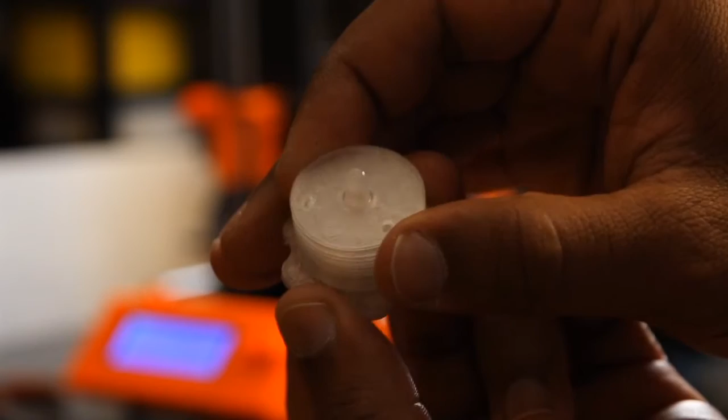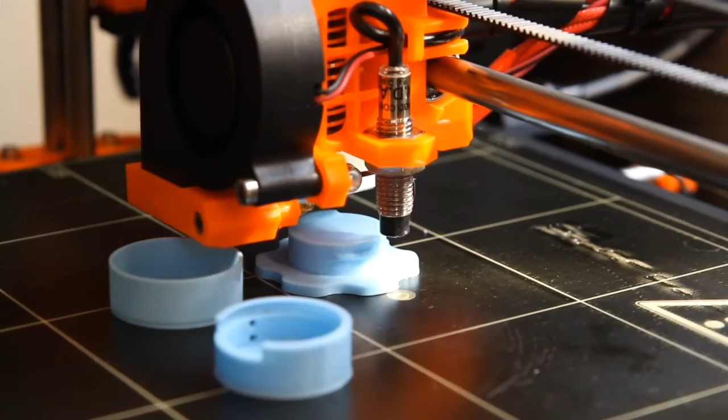So I went about designing these little LED tea lights that basically just turn on and off just by rotating the bottom. All you need for this assembly is an LED, a 3-volt coin cell battery, and your 3D printed parts. After printing and assembling a bunch of these, I inserted them into some of my previous 3D prints.

Check out these lit up prints of my hanging lamp, my giant crystal, my pumpkin, Nefertiti, and even some kryptonite.

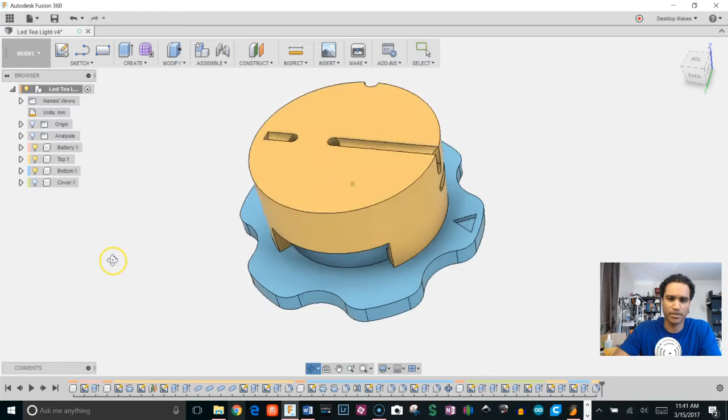So here's the finished model, and as you can see I have these organized into components. As I start untoggling these, you can see the parts below. I'm going to remove the cover, and if I remove that bottom piece, we're left with the battery and the top. I don't need to see the battery right now, so I'll remove that, which leaves us with this top part, which is going to be the focus of what I'm going to show. So I'm just going to show how I created this shape along with these channels and these holes here.

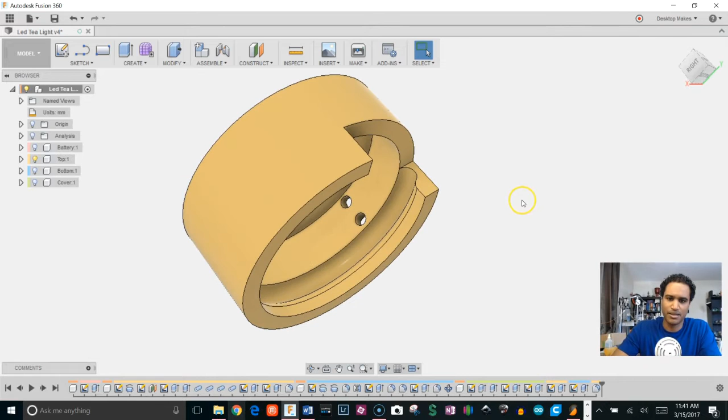I want to mention that when I first started designing, the way I would have approached this would have been to probably create a circle, extrude that down, create an offset circle, and extrude it in to get this cut, and then would have probably gone ahead and created another circle in the middle here to get this groove in the middle. So you're talking 3 steps there.

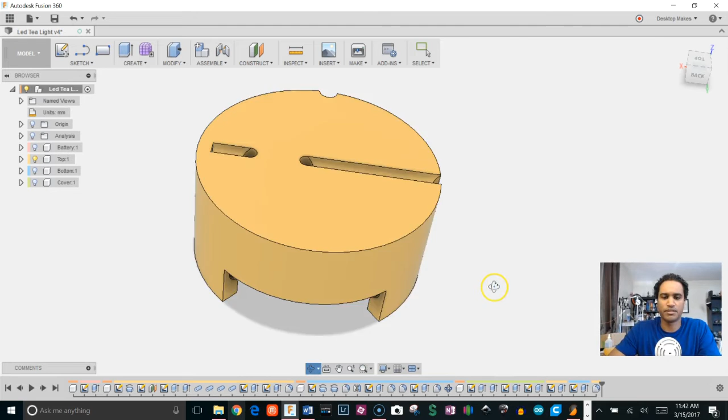The more experience you begin to have, the more ways you start looking into more efficient ways of drawing and modeling. So right now I can tell you the best way really to approach this is just to create a sketch and revolve it. So let's go ahead and do that.

I'm going to go ahead and go to New Design, and the first thing I'll do is keep in line with the sort of design structure I use here, which is I'm going to create a component. Now I'm just going to create this part, but I want to show you guys how I went about creating components. I'm just going to right click over here on the top of my browser where your name, once you saved your file, would be located. So you right click, click new component, and then I'm just going to click on this to give it a name. I'm just going to call it top.

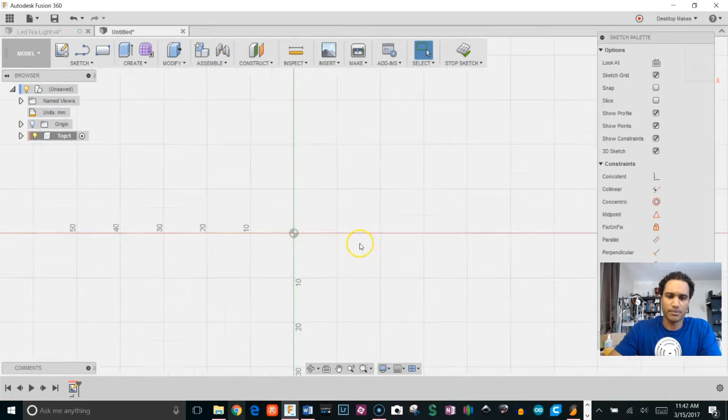Okay, so now I'm ready to begin creating a sketch. I'm going to go to create sketch and choose that ZX plane here. And I'm going to zoom in. I have these grids set to 10 millimeters apart, so I'm going to zoom in to about 1 grid size.

Okay, now I'm going to move fairly quick through this. If you actually want to follow along, check out the design course that I'm going to leave the link below, because I go a lot slower with that and explain and describe each step that I take. But I really want to try to keep this to just a few minutes. So let's go ahead and begin.

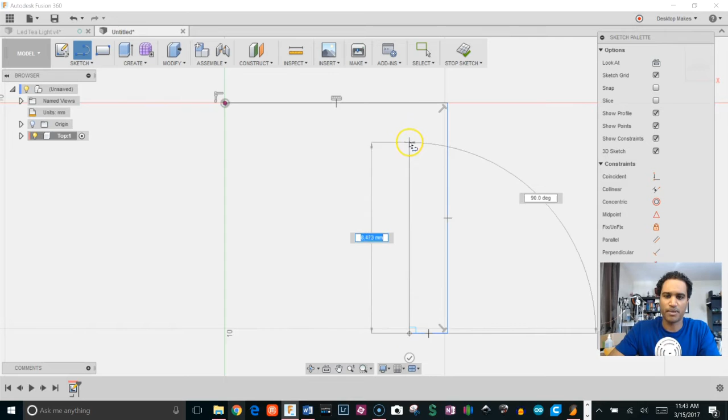I'm going to click the L tool for a line, and I'm going to start with just going ahead and drawing a basic shape of what I want my profile to be, not worrying so much about dimensions. I mean, I'm going to get them close to what I want them to be, but not worrying about getting them spot on. So you see I have a mixture of black and blue lines. Black lines are fully constrained. Blue lines can be moved around.

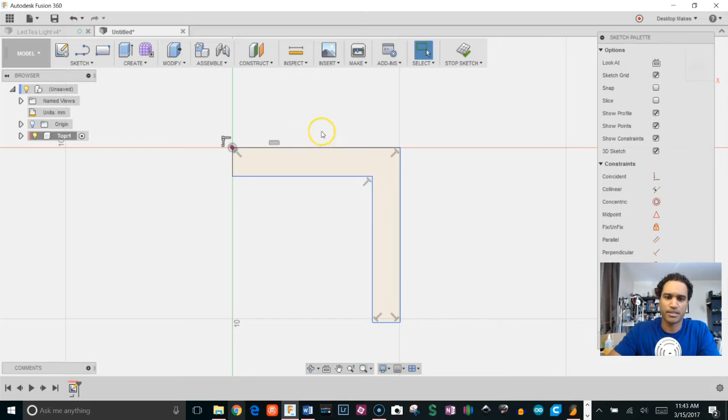So I'm going to hit D for dimension, and start with this line up top here. I want this to be 13 millimeters, I want this side to be 12, the bottom here to be 2, and I'm going to make this side here also 2. Now everything is fully constrained.

To go about and also get this channel in the middle here, I'm going to do that by drawing a circle. Right now I'm just going to put it into space, and I'm going to make it 2.5 millimeters and set that a distance of 3.5 millimeters from this bottom edge. I want this to be on this line, so I'm going to hit the coincident constraint, click on the circle, click on this, click on the circle, click on this line, and there we go.

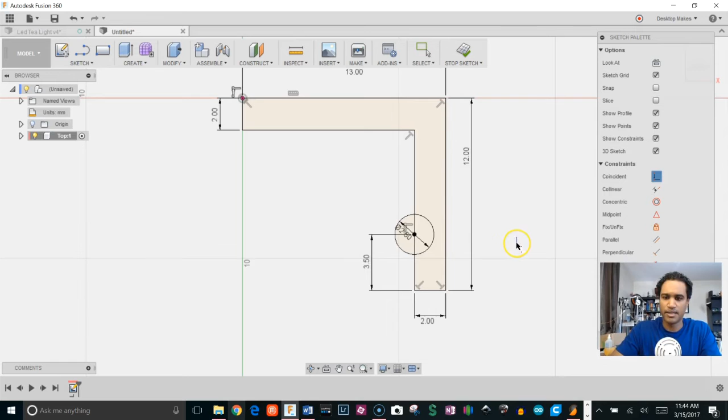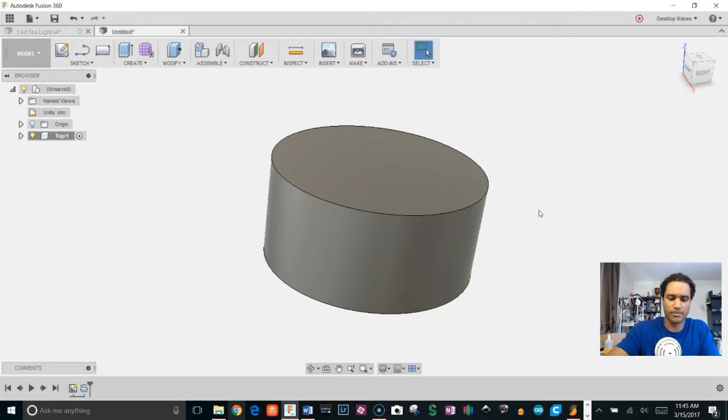So now I have everything I need to create my revolve. I'm going to click on Stop Sketch, and let's go ahead and go to Create Revolve. Click on this, choose Axis, and I'll click on that blue axis there, and that's going to give me a revolve with that channel right in the middle there. So that's my shape. The reason it has this color is because I had Shift N toggled on. If you click on just keyboard Shift N, it'll automatically assign a different color to your different components, just a nice way to kind of keep them organized or visually organized. So you can toggle that on or off if you want.

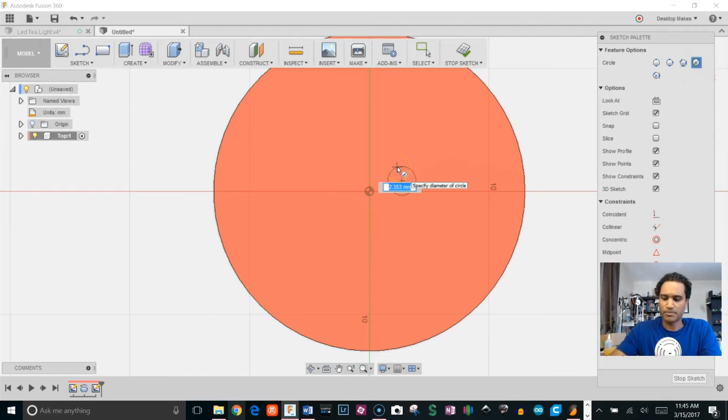Next we're going to go ahead and make the sketches that we need for this top and side profile. So I'm going to create a sketch on this top surface. I'm going to start with a circle, make that 1.5 millimeters, and let's go ahead and constrain that. I'm going to put a horizontal constraint between that and that origin there, and then give it a dimension of 1.5 millimeters.

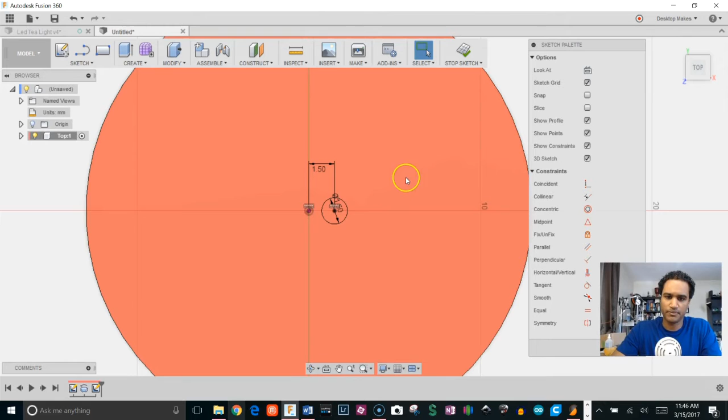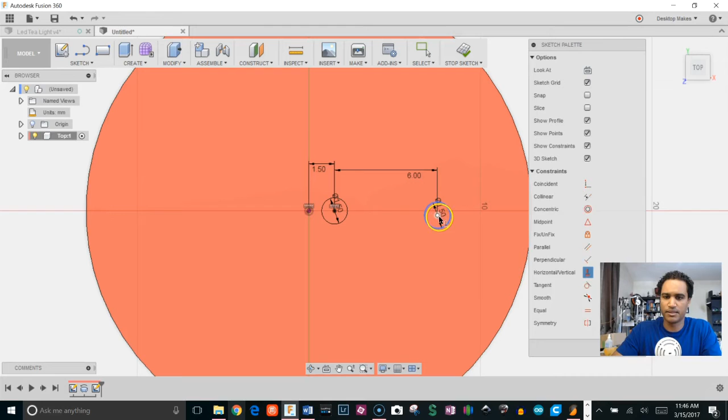Now I can create a second circle by drawing another one, but I can also just choose this, hit Control C and Control V. I'm in my dimension tool, so I have to first get out of that, so I'll hit Escape. Let's try that again. Select the circle, hit Control C, Control V, Command if you're on a Mac, and I'm going to move that over, click OK. D for dimension, this circle to be 6 millimeters from that circle. Notice it's still blue, so I can still move it around, and I have to now go ahead and constrain it horizontally to this origin. Now it's fully constrained, locked in place.

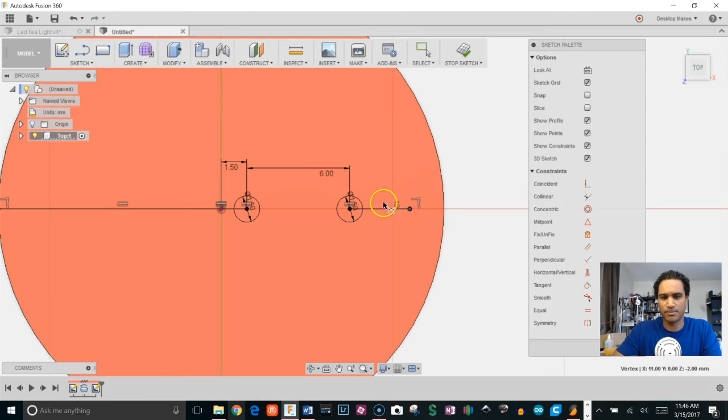Next I'm going to grab the L tool for a line, choose this circle, and go ahead and choose the edge, that perimeter, and let's make that line horizontal. So I'll grab the horizontal constraint, and I'm going to do the same thing with this line. I'm going to give this a dimension of 4 millimeters.

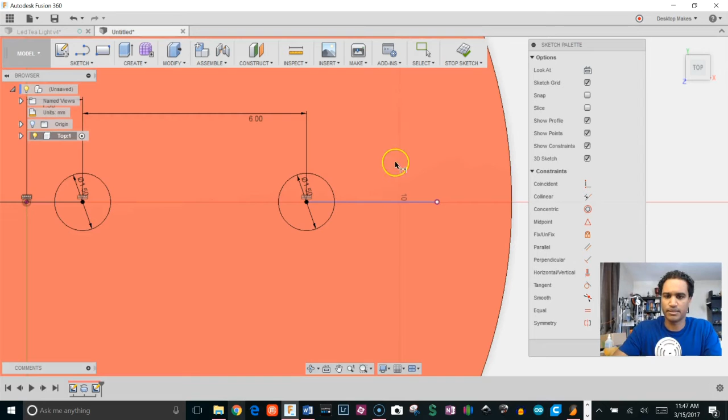Alright, it's telling me I'm over constraining. That's because somehow I accidentally entered a dimension. Let's try that again. Oh, here's also, you see how that constraint, sometimes you have to be careful when you draw things. You can accidentally set constraints that you don't want. So this is a coincident constraint. I don't want that, so I'm going to delete it. Now I can go ahead and dimension this, and it should let me do it.

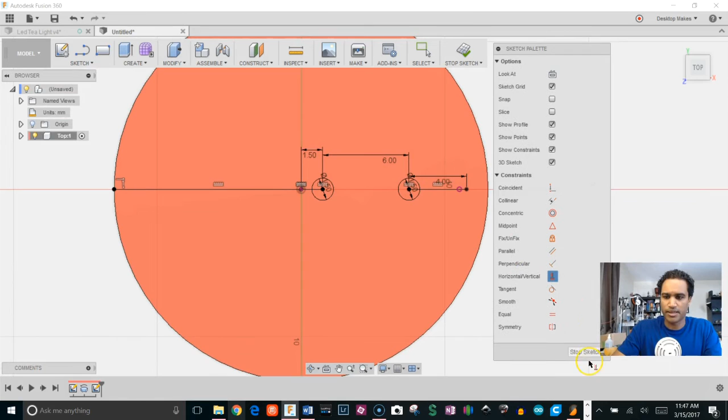4 millimeters. And that line is still blue, so it means that it's not fully constrained, which means I can move it, and I don't want it to move. So I'm going to grab my horizontal constraint, click on that line, and there we go. Okay, so let's go ahead and stop that sketch. That's everything we need. Everything is all black and fully constrained.

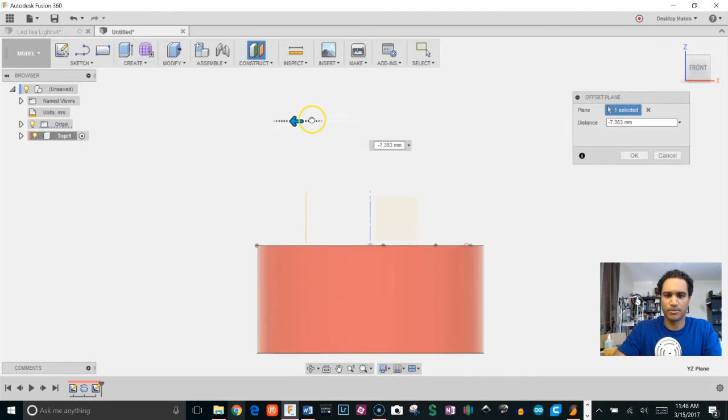Now I want to go ahead and draw the sketches to make this shape here. So let's go back, and to do that I'm going to create an offset plane. Click my origin on and select this YZ plane, and let's go ahead, we get this arrow so we can move it over left or right. Pay attention to the sign here: if I go right, it's a positive number, if I go left, it's negative. So I know that the radius when I first drew that profile was 13 millimeters, so I have to enter negative 13 millimeters if I want it on the other side.

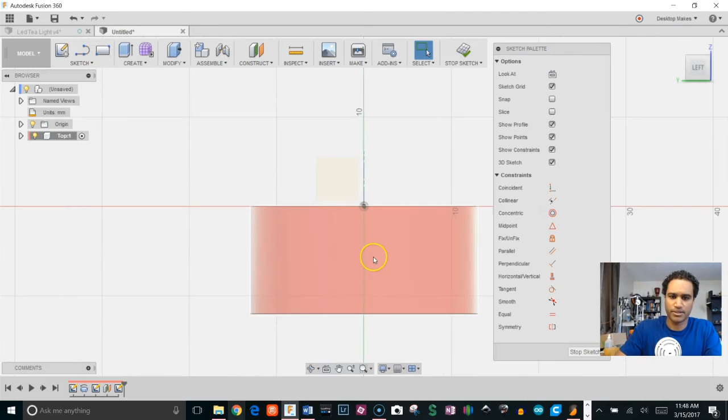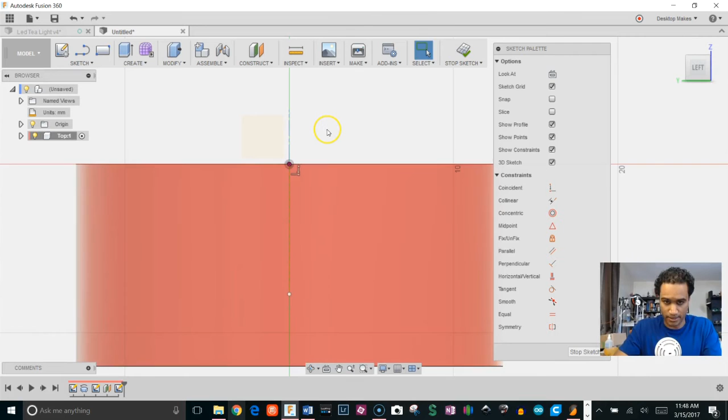I'm going to click OK, and then I'm going to click Create Sketch and sketch on that plane. So I'm going to start with the L tool for a line, just draw a line straight down, and I'm going to click X and make that a construction line. It brought in this projected line, and I don't need that, so I'm going to delete it, click on it and just hit delete. Now this I find a little bit annoying, how this highlights every time I hover over this shape.

So in order to avoid that, I'm just going to go ahead and expand my component here and uncheck bodies.

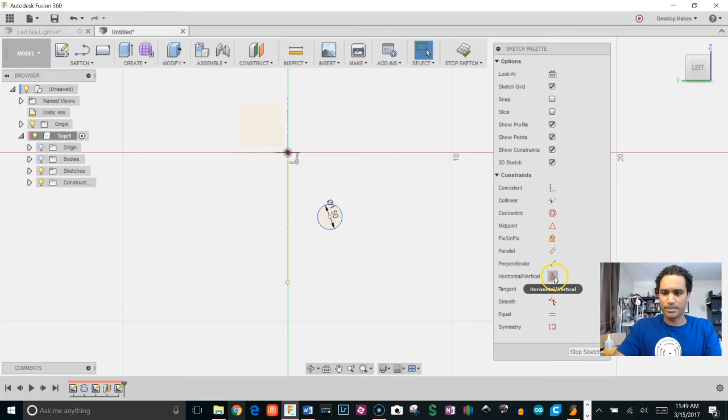Alright, so let's start with a circle. I'm going to draw a circle, give it a diameter of 1.5 millimeters. Let's go ahead and set that circle. Actually, let's do a dimension first.

We'll hit D for dimension, and we'll make this circle from this origin... let's do 3 millimeters. Actually, I want to point something out, so I'm going to hit Control Z real quick. Can't help myself. If I hit this and this, I get this dimension. That's a straight line dimension, and if I go more out, I get this vertical dimension. So you can choose which one you want.

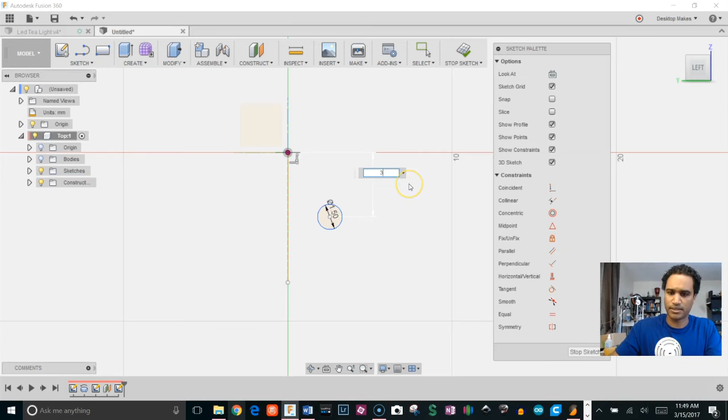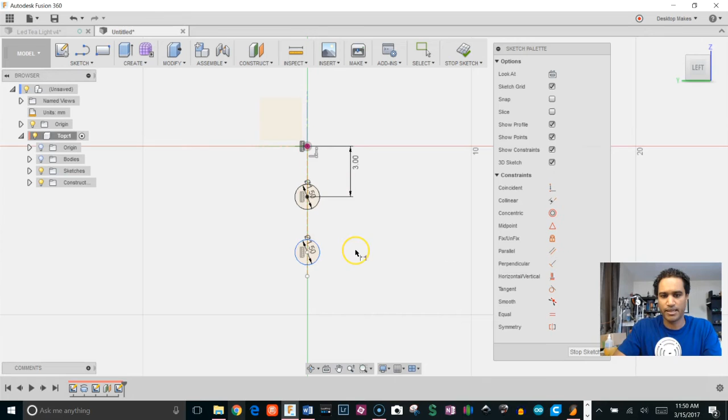Once you see it, just click and enter your dimension. I'm going to make that 3 millimeters, and I'm going to vertically constrain that to the top here. Let's select this circle, Control C and Control V to put a new copy down here. I'm going to click OK. I'm also going to vertically constrain that to this point, and let's enter a dimension from here to this circle, and I want that to be 3 millimeters.

Okay, so honestly I didn't really need this construction line because I ended up constraining everything to this origin, so I'm just going to delete it. I don't really need it. So I'm going to hit L for a line and draw a line from this origin to the center of this circle, and then I want another line from here going out.

Now the dimension here is kind of getting in the way of that, so I'm just going to move that over, move this one over as well. Hit L for a line, grab that center, come out, click OK, and we'll dimension this to be 4 millimeters.

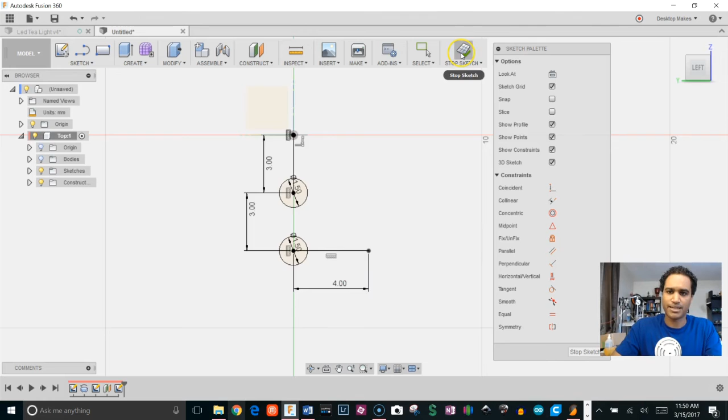Okay, that's good for that sketch, so I'm going to click on Stop Sketch, toggle back on my bodies. I don't need to see that origin here, so I'm going to untoggle that. Now I'm ready to create some extrusion, so I'm going to hit E for Extrude, grab these two circles, and start bringing them down.

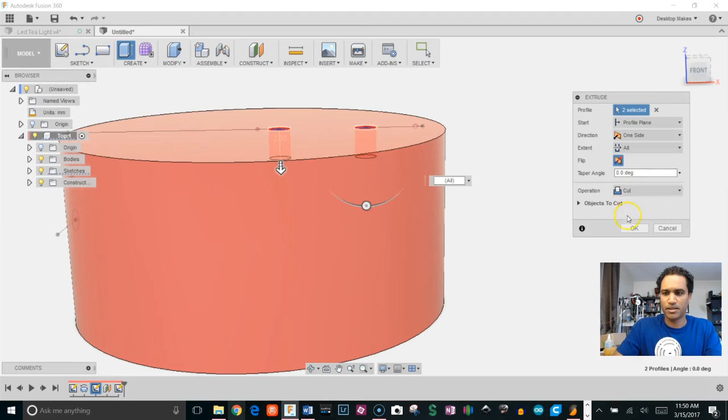So what I'm going to do here is, for distance, I'm going to choose all, click OK, and I can see that they went all the way through.

I'll do the same thing with these circles, grab both of them, move them in. Now if I choose all for distance, notice that it's going to go all the way through the other side. I don't want that, so I'm going to pull them back, just make sure they go all the way through that side, and then click OK.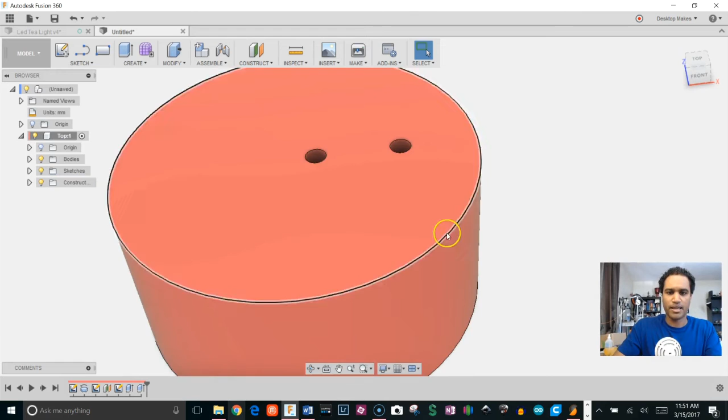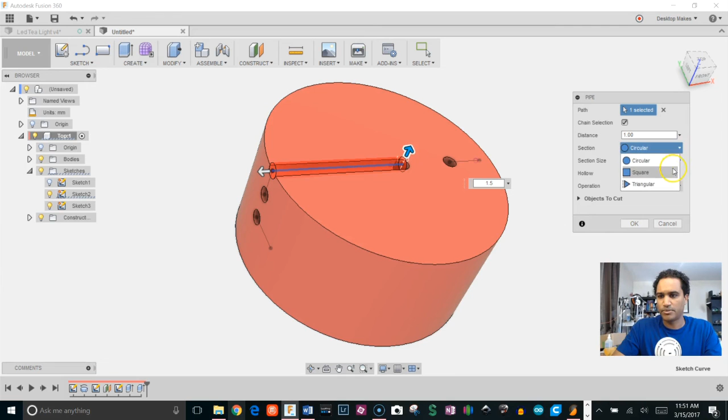Now to make these channels, I'm going to use the pipe command, but I need to see those sketches. So I'm going to click on sketches and make sketch 2 and 3 visible. Then I'm going to go to create and down to pipe, click on this, and I want that to be 1.5 millimeters in diameter, so it matches my circle. You have the option to make it a triangle or square. I want circle in this case, and it's going to be cut, so I'm going to click OK.

Now right click and choose repeat pipe. Choose this particular line this time, give it 1.5 millimeter diameter, and do it a third time, repeat pipe, again 1.5 millimeters, and one final time for this line, and 1.5 again.

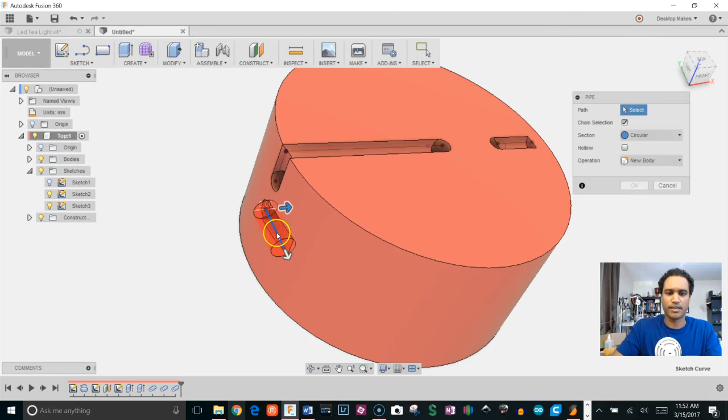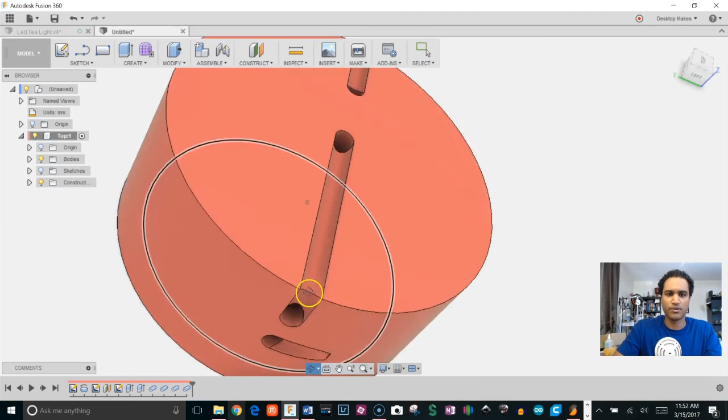Alright, so that's it, I don't need to see my sketches anymore. So there are my channels and my holes there. Basically the way that's going to work is the LED, one leg of the LED, the negative leg, will go down here, come back up, and be recessed inside this channel here. The other leg will just follow this trench, go down, go inside this hole, and then come back through this one and be recessed in here.

So that's it. 11 minutes.

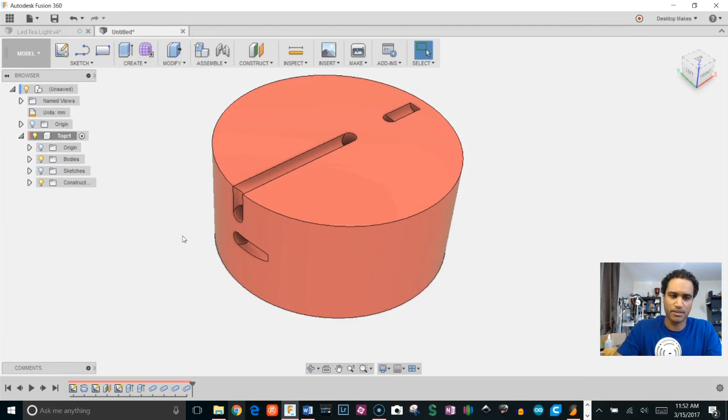But again, I just want to stress how important it is to design using components, which makes your designs flow a lot better. It makes editing them a lot better, more efficient.

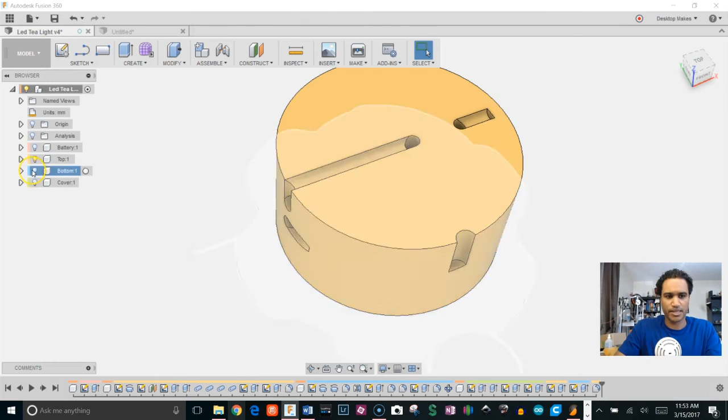Right now you see I'm back in my original design where I have all these different parts here. You can see my timeline goes pretty far, but if I wanted to, for example, just edit that top piece, all I have to do is activate that component, and that will reduce the timeline to show only the aspects of that particular part, which makes editing a lot simpler.